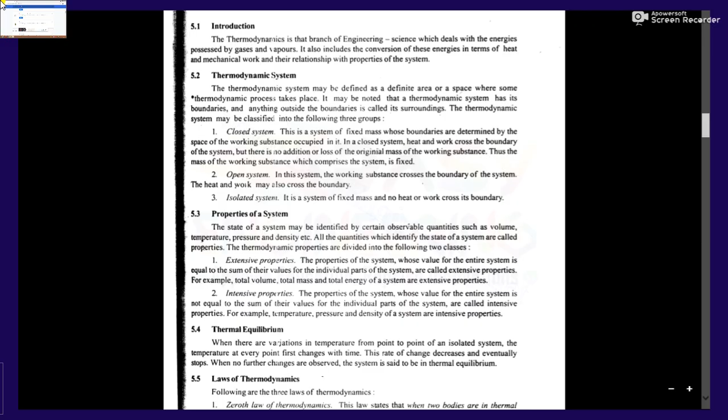Today we will talk about thermodynamics. What is thermodynamics? Thermodynamics is that branch of engineering science which deals with the energies possessed by gases and vapours. It also includes the conversion of these energies in terms of heat and mechanical work and their relationship with the properties of the system.

Then what is a thermodynamic system? It may be defined as a defined area or a place where some thermodynamic process takes place. It may be noted that a thermodynamic system has its boundaries, and it is classified into three systems: closed system, open system, and isolated system.

What is a closed system? It is a system of fixed mass whose boundaries are determined by the space of the working substance occupied in it. In a closed system, heat and work both cross the boundaries, but there is no addition or loss of the original mass of the working substance, so the mass of the working substance is fixed.

And what is an open system? In an open system, the working substance crosses the boundaries of the system, and the heat and work both cross the boundaries. An isolated system is a system of fixed mass where no heat and work can cross the boundary.

Then what are properties of a system? The state of a system may be identified by certain observable quantities such as volume, temperature, pressure, density, etc. All the quantities which identify the state of a system are called properties. Properties are classified into extensive and intensive properties.

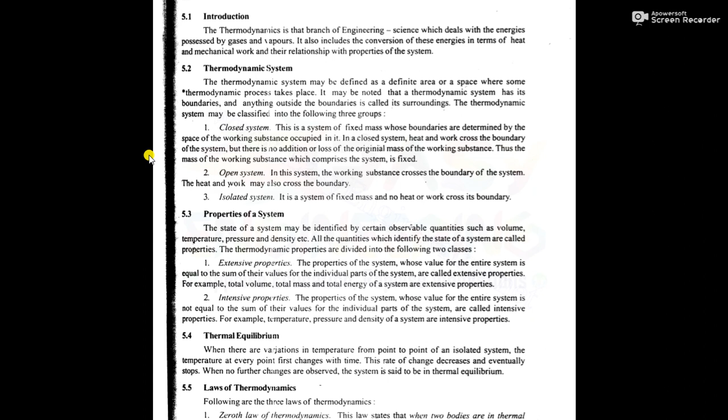In intensive properties, the value of the entire system is not equal to the sum of the values of its individual parts, and it does not depend upon the mass. These are called intensive properties, like temperature, pressure, density.

Then thermal equilibrium: when there is variation in temperature from point to point of an isolated system, the temperature at every point first changes with time. This rate of change decreases and eventually stops. When no further changes are observed, the system is said to be in thermal equilibrium.

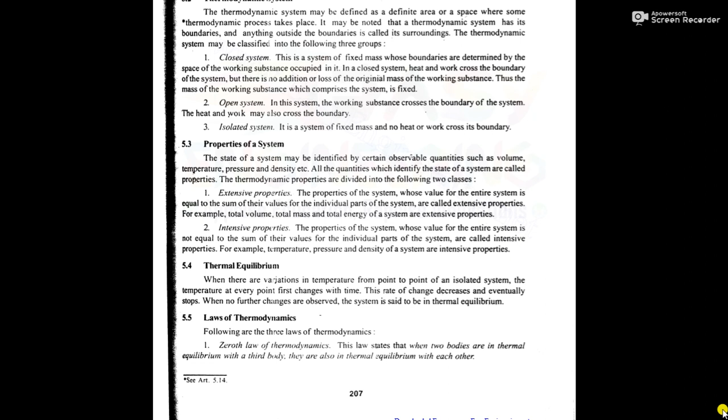Zeroth law: what is the zeroth law? This law states that when two bodies are in thermal equilibrium with a third body, then they are also in thermal equilibrium with each other.

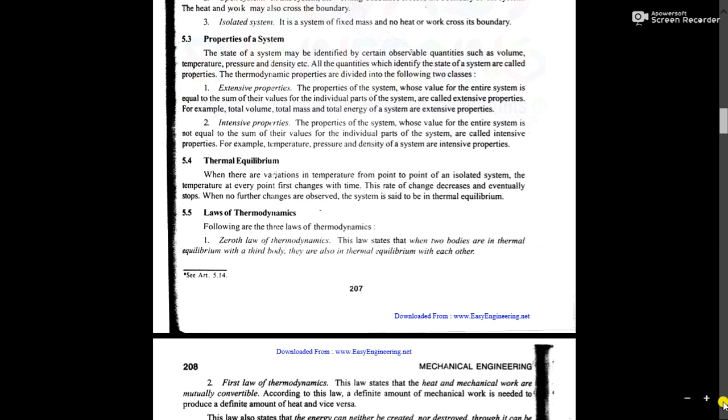Then the first law of thermodynamics states that heat and mechanical work are mutually convertible. According to this law, a definite amount of mechanical work is needed to produce a definite amount of heat and vice versa. This law also states that energy can neither be created nor destroyed, though it can be transformed from one form of energy to another.

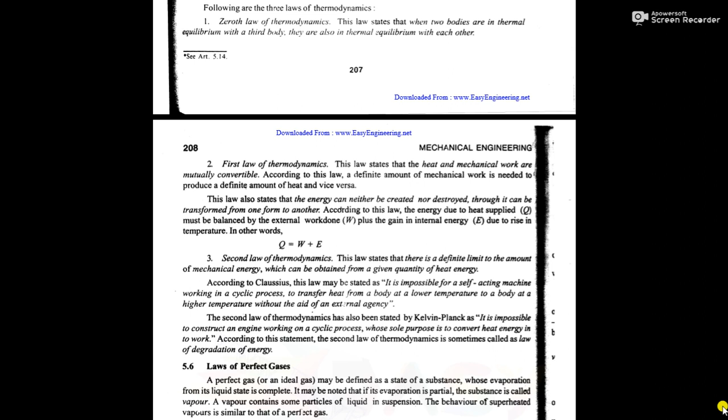According to this law, the energy due to heat supplied must be balanced by external work done plus internal energy due to rise of temperature.

Then the second law of thermodynamics states that there is a definite limit to the amount of mechanical energy which can be obtained from a given quantity of heat energy. According to Clausius, this law may be stated as: it is impossible for a self-acting machine working in a cyclic process to transfer heat from a body at lower temperature to a higher temperature without any external work.

The second law of thermodynamics has also been stated by Kelvin-Planck, as it is impossible to construct an engine working on a cyclic process whose sole purpose is to convert heat energy into work energy. According to this statement, the second law of thermodynamics is sometimes called the law of degradation of energy.